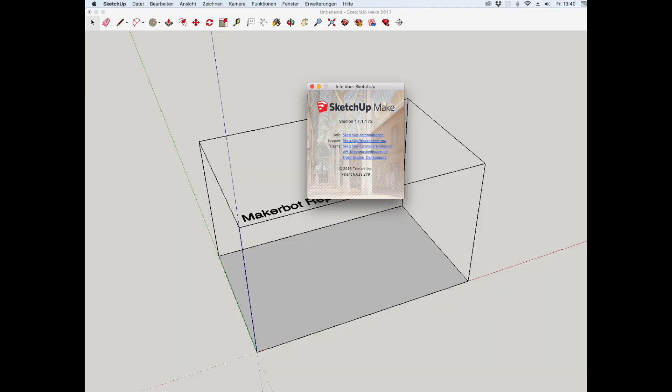If you have a camera, it's very likely that you also have quite a lot of SD cards. Wouldn't it be very nice to have a nice little box to put them all in? I'll show you how I design such things with SketchUp, but of course you can also download the files from fluxing.de.

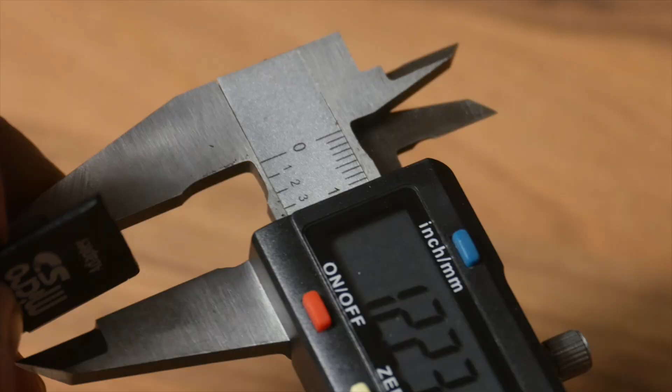First I need to know the dimensions of the SD card. Then I open the CAD program SketchUp. The free version will do. It looks something like this. It is important that the unit of the model is set to millimeters. First I draw a rectangle.

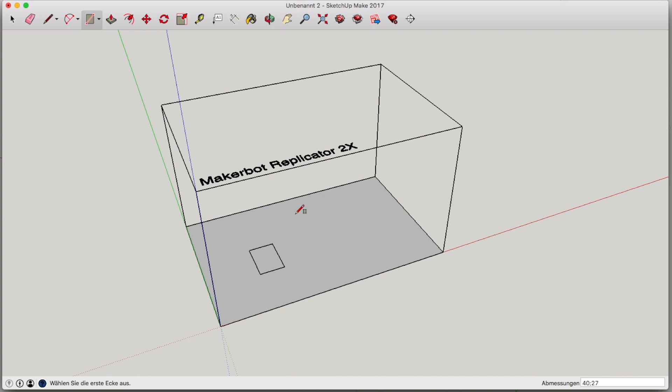I click in one corner and draw the rectangle. However, I do not click on the other corner, but I simply enter the desired edge lengths in millimeters and confirm this with the return key. I think we can get rid of the MakerBot build volume now. This should only give you an impression of the size of your model. Simply click with the selection tool and then press delete.

Now I activate the push-pull tool. I use it to pull on the surface of the rectangle, turning the 2-dimensional rectangle into a 3-dimensional cuboid. Again, I can simply enter the height, in this case 2 millimeters. This will be the bottom of the box.

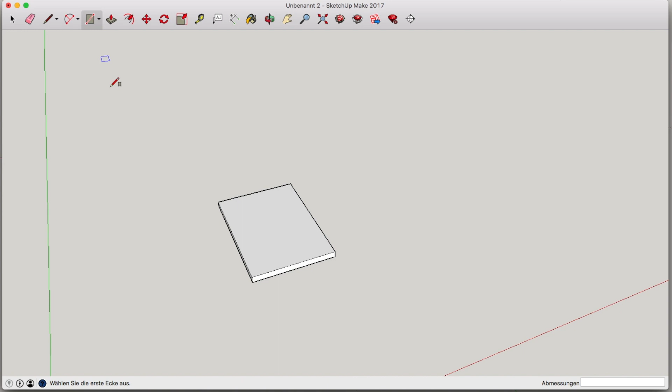Now I draw another rectangle. This will later be a card slot. I make it a little bigger in each direction so that the SD card has some room to move. With the move tool, I move the rectangle to the... that was just the edge. So again, select the surface with the selection tool, then move it onto the box with the move tool.

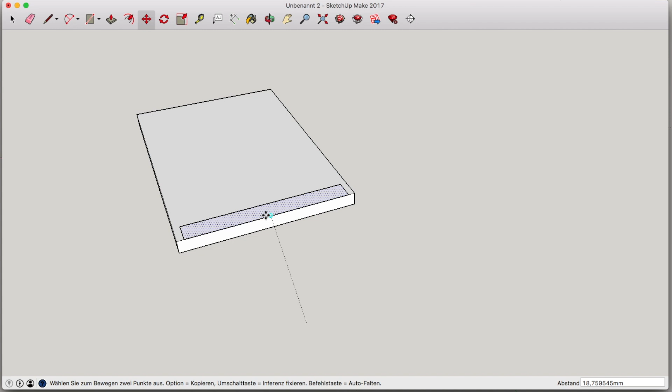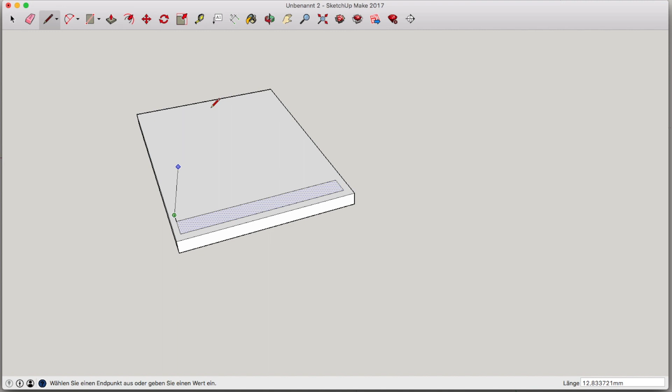The rectangle is still selected, so I can directly copy it with Command-C on the Mac or Control-C on Windows. Okay, that's hard to get into position right now. We'll do that differently. With the line tool, I draw a guideline. The tool now wants to draw more lines, but you can get out of it with the escape key. The rectangle has remained selected the whole time.

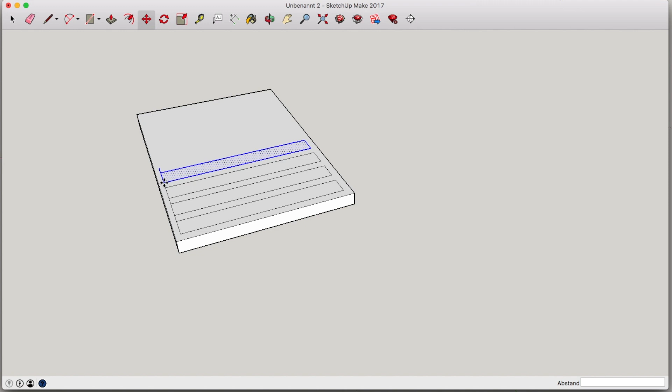Now I use the selection tool with the shift key pressed to add the guideline to the selection. Now I hover the mouse pointer over the left corner, copy with Command-C or Control-C. When I then paste it, the copy hangs with its corner from my mouse pointer until I place it somewhere, in this case at the end of my guideline. I do this a few more times, and I delete the last guideline.

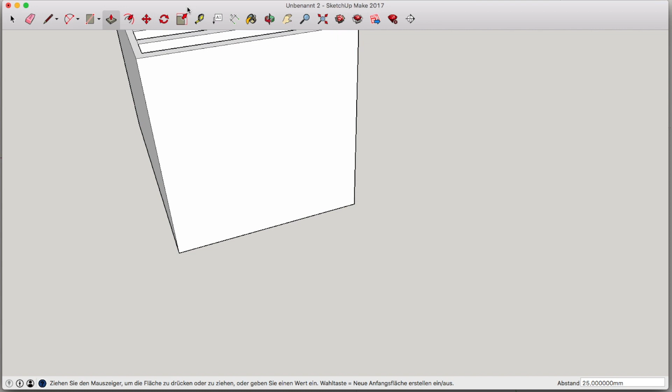Now I use the push-pull tool to pull everything around the rectangle upwards. That's one continuous face. Again, you can simply type in a value. Now the end is shortened a bit with the push-pull tool and the card holder is already finished.

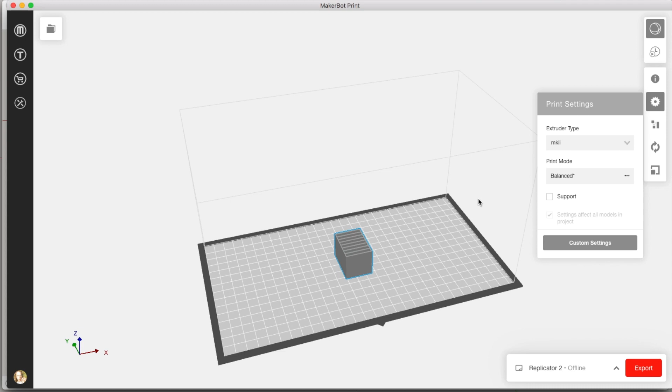The model is exported as an STL file. For this you have to install a free plugin. In the software of the 3D printer, in my case MakerBot, the STL file is imported and can be printed without any modifications. I do this by exporting the file for the printer to an SD card, which then is inserted into the printer and I print from there.

That takes about an hour in this case. I have sped it up a little bit. By the way, the black spots aren't meant like that. They were probably remains of black filament sticking to the nozzle.

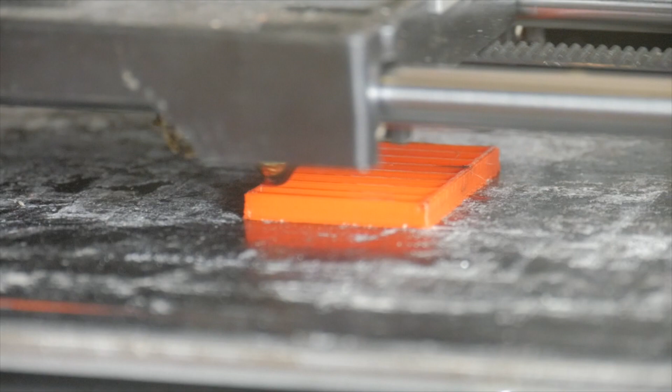Done. That was easy, wasn't it?

Now, I have a couple of these very cheap tripods. They are very differently made and from different brands. This one is Hammer, the one over there is Bonus, but they seem to have the same quick mount plate. And I have this great Takstar microphone you just heard me through, but I want it as close to me as possible, so I'd like to put it on one of these tripods, but it doesn't fit. So we need an adapter.

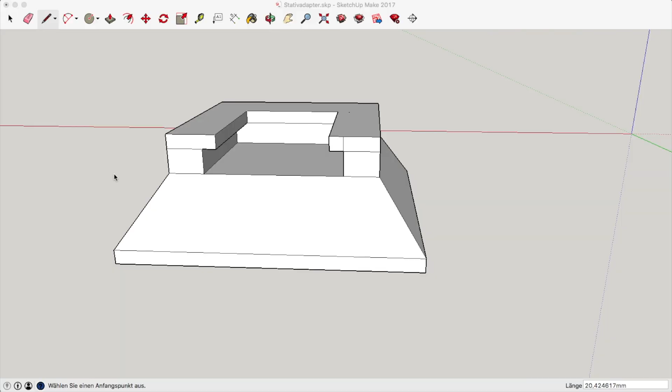That's what it should look like. I've already finished it, but I'll repeat it here to show you how I designed it.

Again, I start with a rectangle. With the push-pull tool, the surface is pulled upwards. I enter 2 mm as the distance. Now I pull again with the push-pull tool, but I press the Alt key. This creates a new segment.

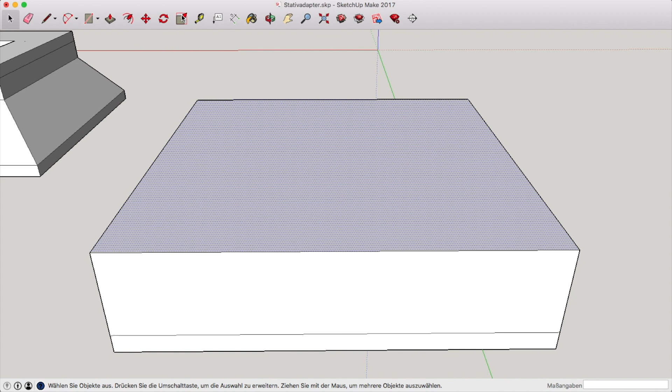This part is supposed to be pyramid shaped, so the upper surface should be smaller. For this I use the Scale tool, which allows me to shrink the area. If I press Alt, this can be done symmetrically. I type in the factor 0.7.

Now we need the cutout for the foot of the microphone. I think I'll make some guidelines for that. The tools in SketchUp will snap to the middle of a line, appearing as a light blue dot. From there I draw a 10 mm long line to the left and to the right. Well, one of the lines would have been enough actually.

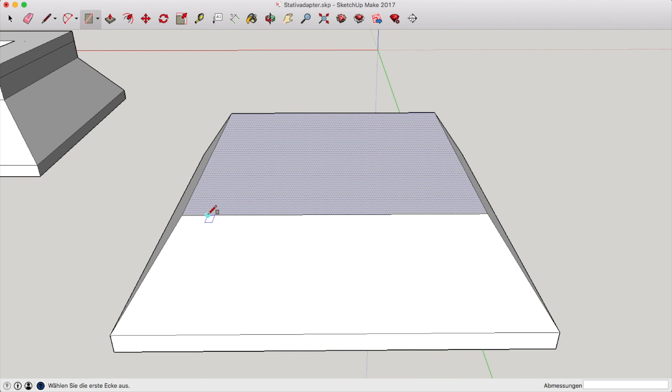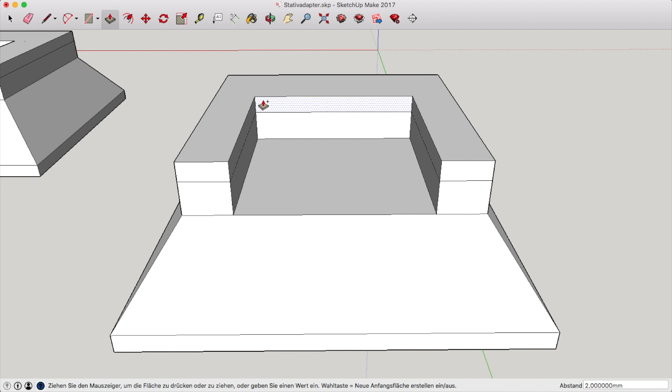With the rectangle tool I click on the end of my guideline, and the tool will snap to it - it's a green dot. Then I draw a 20 by 20 mm rectangle, and use the push-pull tool to raise the edge by 3.5 mm, then press Alt to raise it again by 2 mm. The upper inner surfaces are pulled inwards with the push-pull tool. Now all unnecessary lines can be erased, but basically we're done.

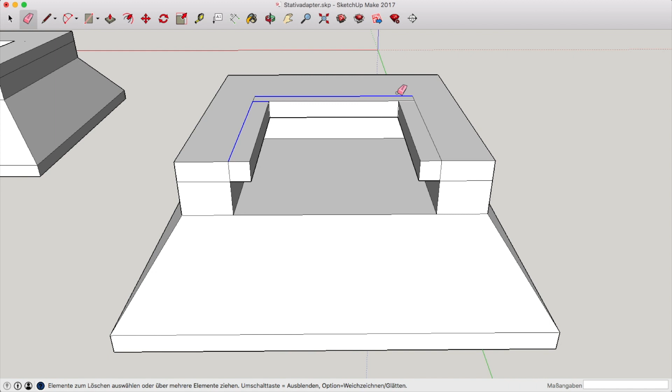The third part is about the microphone again. This came with a dead cat. However, with a very wide-angle lens, the fur gets into the top of the image. So now we're building a hot shoe extension. This video is already quite long, so I'll speed it up a little.

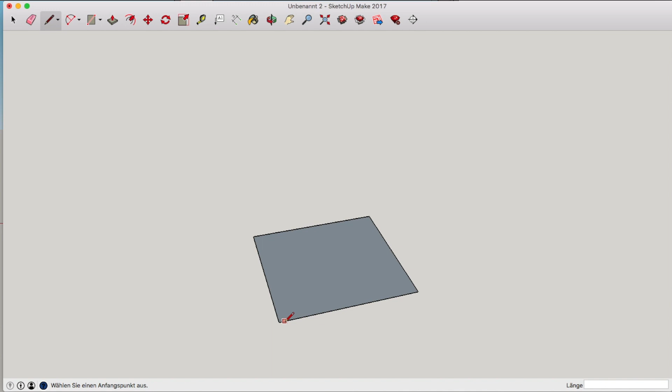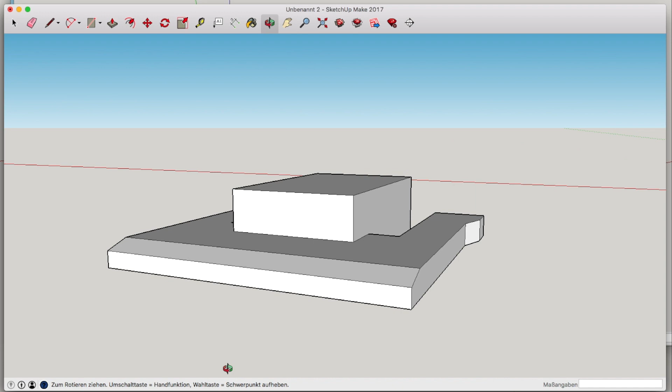I'll start again with a rectangle. This will be the foot that goes into the shoe, but it will get small ears so that it fits firmly into the flash shoe. I draw guidelines - you can't see them, but the tools snap to their endpoints. The upper part is simply stolen from the last model.

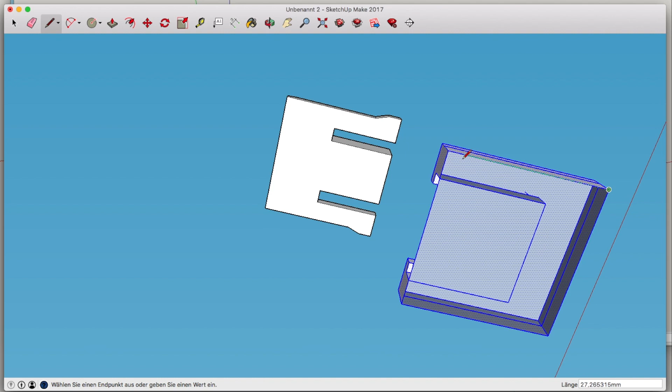I can select a wide area, but now there are a few edges and surfaces too many selected. I take them out of the selection while holding down the Shift key. The part is copied and pasted onto the new model. However, it is now open at the bottom. When I draw along any line, the corresponding area closes.

Now I'll add some more material downward. The blue surfaces are inside surfaces - they need to be reversed. Now the shoe is the wrong way around.

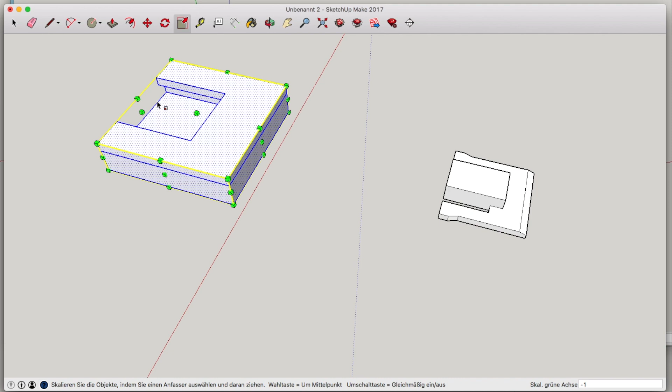I could rotate it, but I would rather mirror it. I select it and activate the Scale tool. When I push on one of the buttons in the middle of any surface, my object is compressed, and when I push over the opposite side, it is mirrored. As the scaling factor, I enter -1.

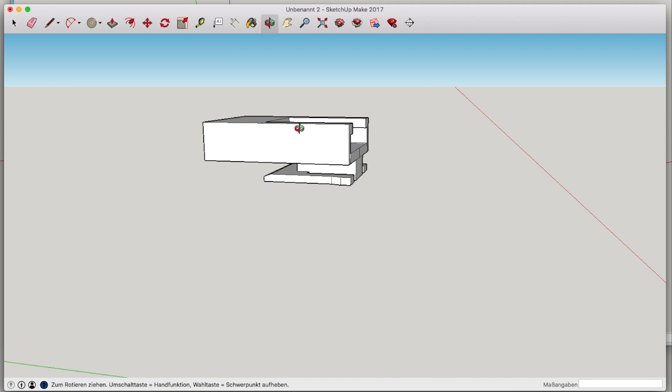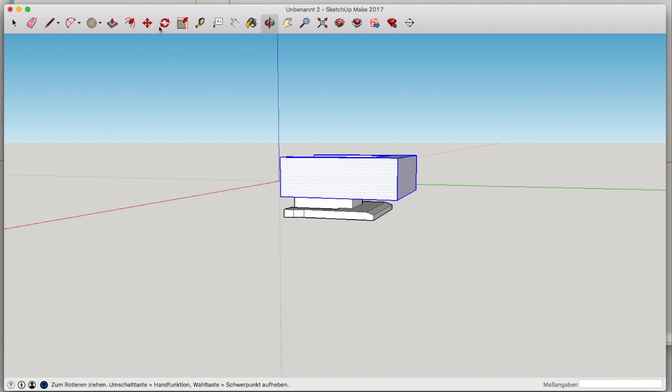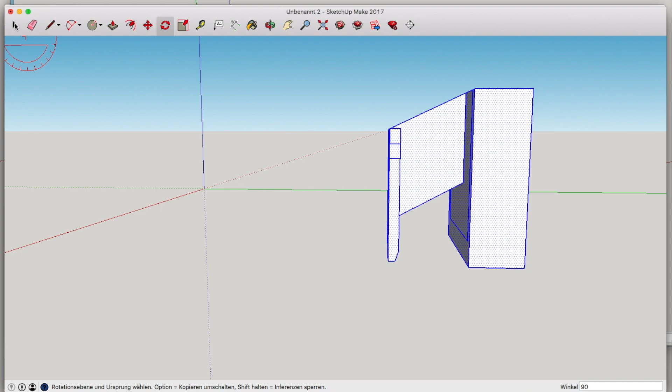But this is difficult to print because of the large overhangs, so I move the shoe and put the model on its side. Now the only thing that's not on the ground is the mast, and because of the bevel it can also print without support.